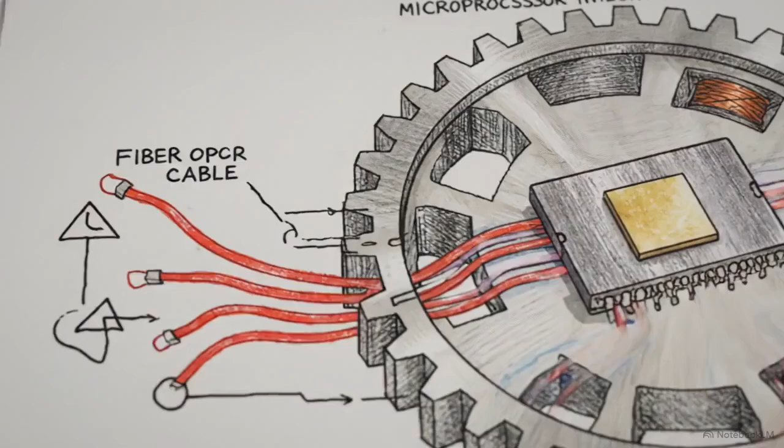When you embed a traditional machine with the capacity to process data, the digital logic and physical components operate as a single unit. The word mechatronics combines mechanism and electronics. This etymology reflects a design philosophy where the boundary between hardware and software is removed.

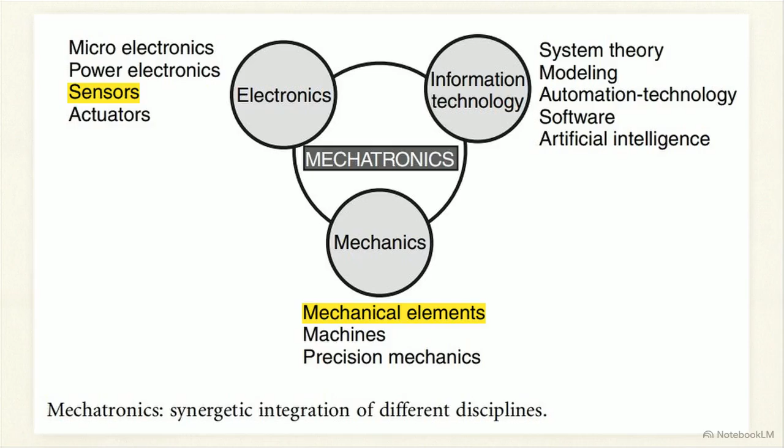This diagram illustrates how those boundaries overlap, showing the intersection of mechanics, electronics, and information technology. The components on the right, information technology, guided by system theory and automation software, serve as the bridge allowing mechanical parts to communicate with electronic sensors. The purpose is to apply complex decision-making to the operation of physical systems in real time.

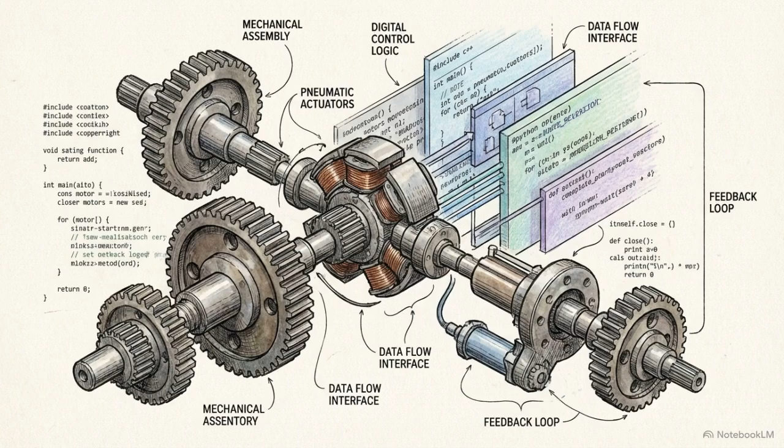Mechatronics requires a concurrent engineering approach, where computer logic and physical gears are designed together from the start of the project. Engineers have been combining these systems for the past 30 years. Many professionals naturally designed mechatronic products long before the field was formally recognized.

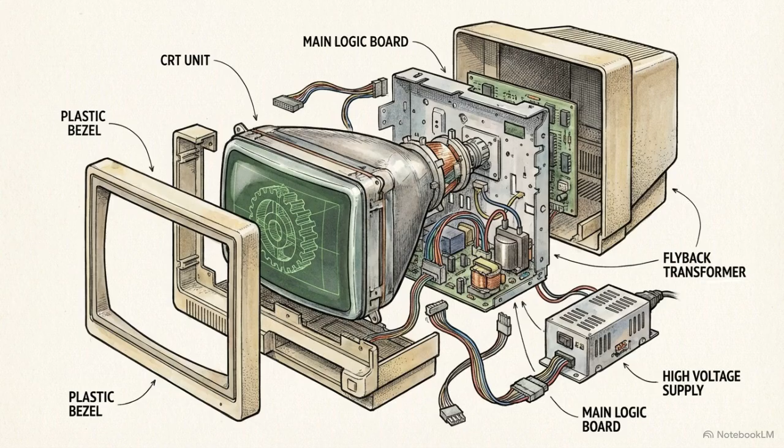The formalization of this practice traces back to the early 1980s. The turning point was the commercial arrival of the cost-effective microprocessor. Once engineers cheaply embedded processing power directly onto hardware, engineering design constraints shifted. Today, that growth is sustained by the ongoing information technology revolution, rapid advances in wireless communication, and embedded systems engineering.

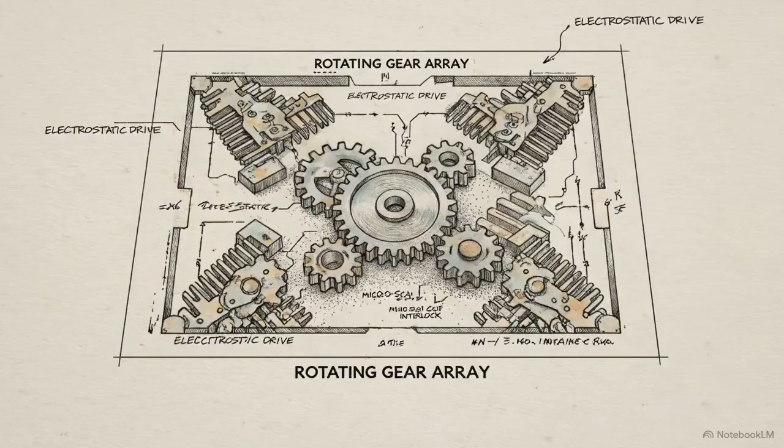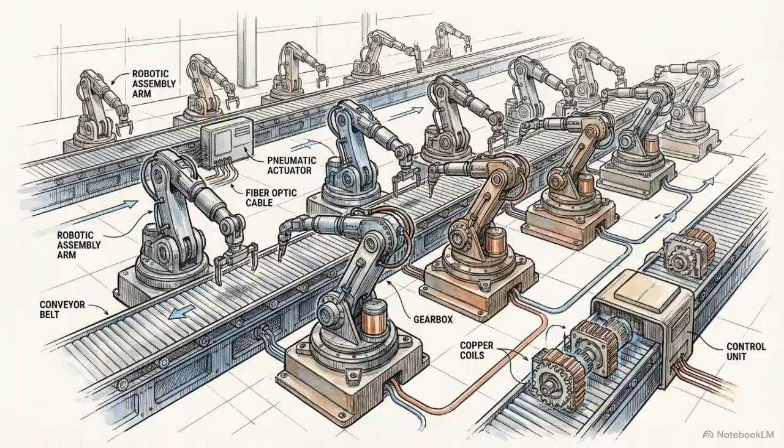The hardware driving this forward is heavily reliant on MEMS technology. MEMS, or microelectromechanical systems, are microscopic devices that integrate mechanical and electrical components on a single silicon chip, enabling advanced smart sensors. As the performance-to-cost ratio of microprocessors and MEMS sensors increased, mechatronics moved from an academic theory into a standard requirement for modern manufacturing.

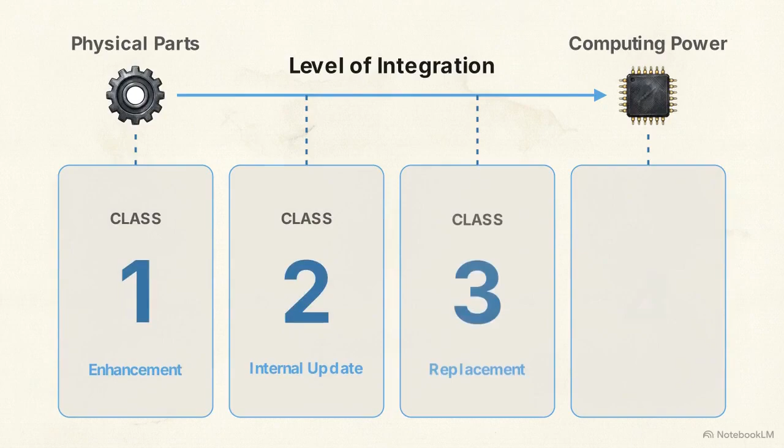Based on the level of integration between physical parts and computing power, all mechatronic products fall into one of four distinct classes. Class 1 consists of mechanical products where electronics are added to enhance an existing physical function.

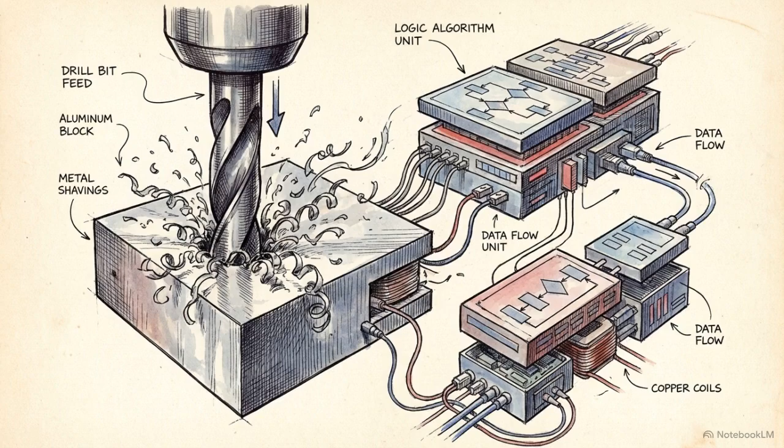Examples of Class 1 include variable speed drives and NC machine tools. NC, or numerical control, refers to the automated control of machining tools via programmed commands, updating a physical machine with digital instructions. Class 2 involves mechanical systems with updated internal electronics, while the external user interface remains unaltered.

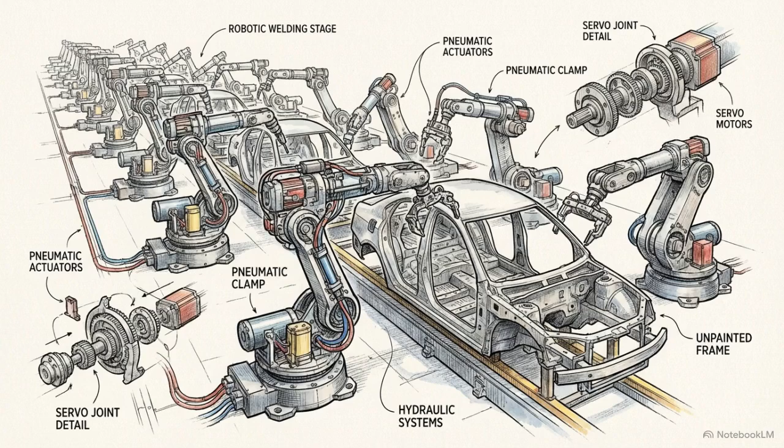Automated manufacturing lines and modern sewing machines fall into this category. Class 3 systems retain the functionality of their traditional mechanical predecessors, but their internal physical mechanisms are replaced by electronic components.

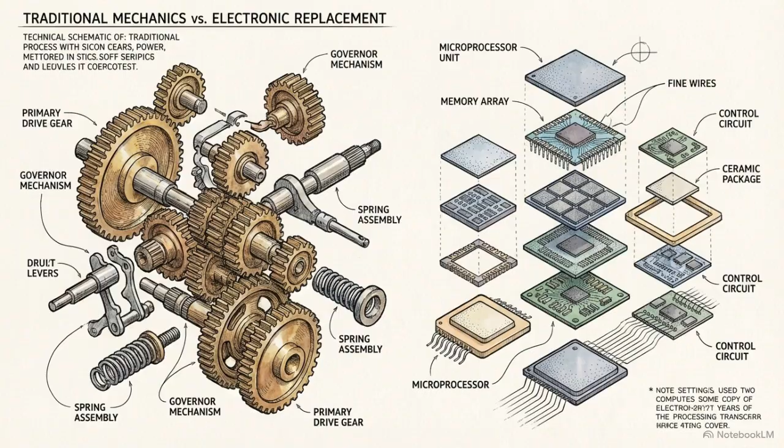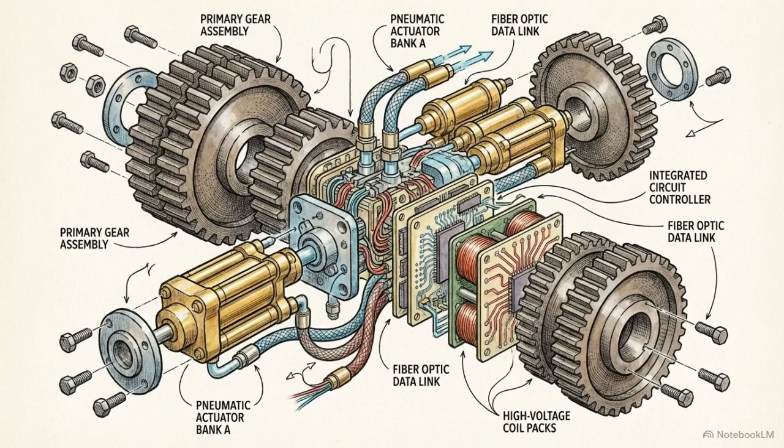The digital watch is the definitive Class 3 system. It tracks time like an analog watch, but the physical mainspring and gears are replaced by a quartz crystal and digital logic. Class 4 products are conceived from the start with mechanical and electronic technologies integrated synergistically.

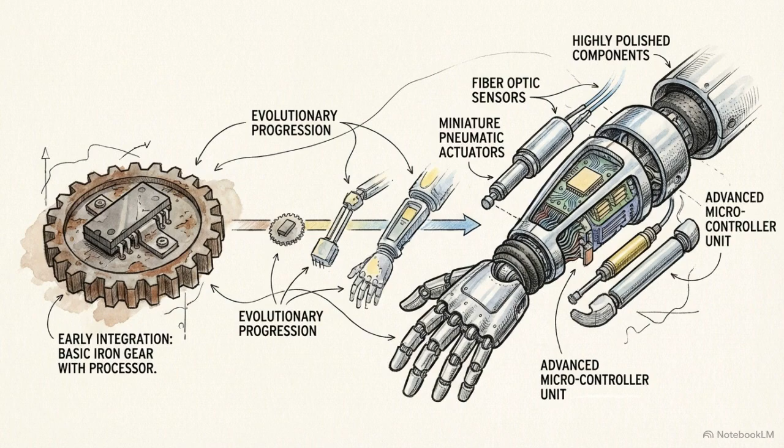Intelligent washers, rice cookers, and automatic photocopiers are Class 4 systems. They require sensors, software, and moving physical parts to function as a single unit. The move from Class 1 to Class 4 documents the shift from treating electronics as a mechanical add-on to treating the machine as a cyber-physical entity.

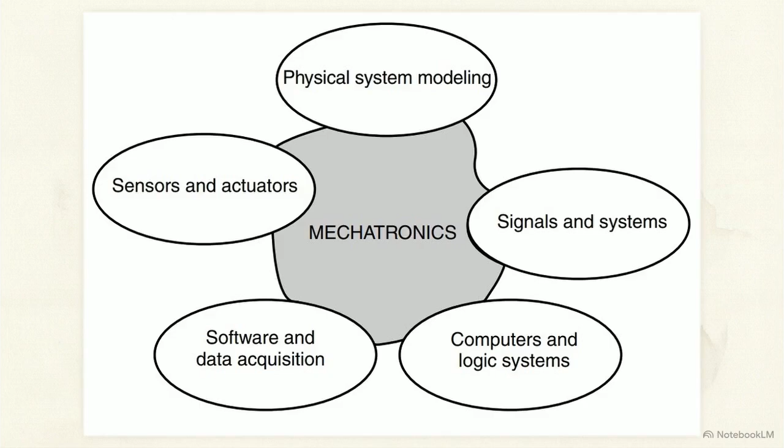This mind map outlines the specific architecture required to build those systems. The study of mechatronics is divided into 5 distinct areas of specialty. Focusing on the top center node, the first element is physical system modeling.

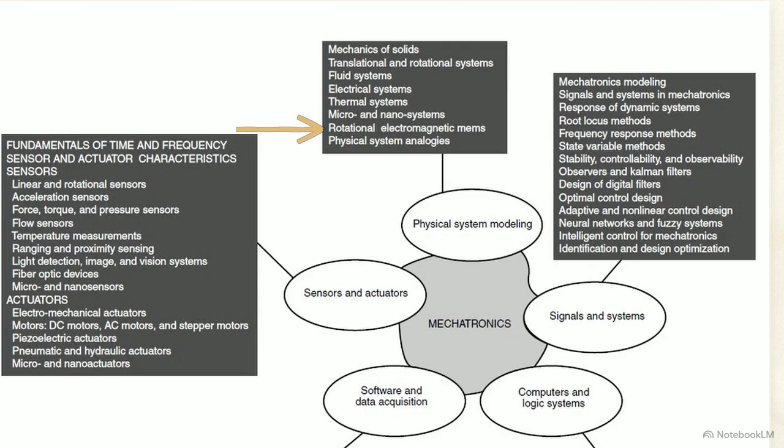This requires calculating mechanics of solids, translational and rotational systems, and tracking fluid, thermal, and electrical dynamics. This list includes rotational electromagnetic MEMS, as physical modeling now extends to microscopic levels.

This detailed view of the left-hand node outlines the second element, sensors and actuators. The top half lists the input devices required to measure the environment, including linear and rotational sensors, acceleration sensors, force and torque measurements, flow sensors, and vision systems.

Once the environment is measured, the system uses actuators to move. These include electromechanical actuators, DC, AC, and stepper motors, alongside piezoelectric, pneumatic, and hydraulic systems.

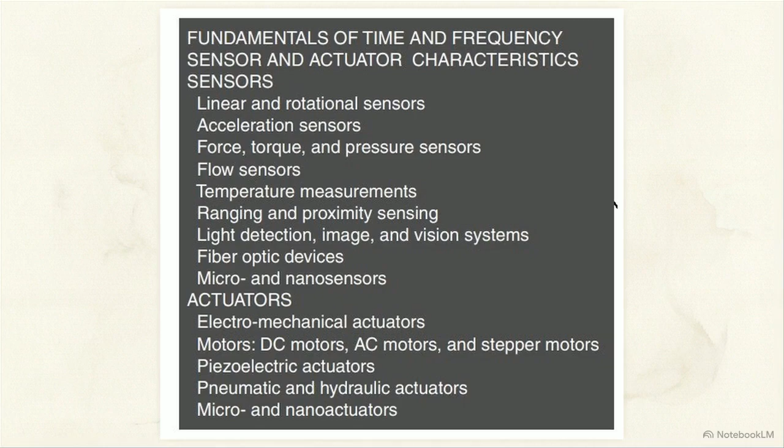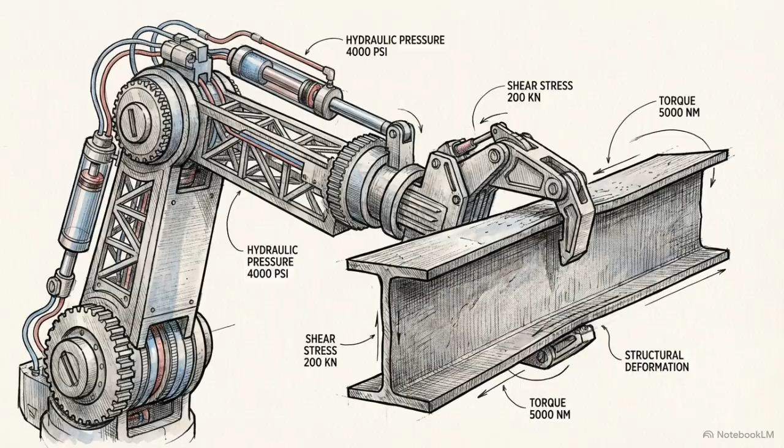Elements 1 and 2 establish the physical constraints, dictating what the machine can endure and how much force it can exert on its environment. Looking at the right-hand node of the schematic, we move to the intangible logic that governs that hardware. Element 3 is signals and systems.

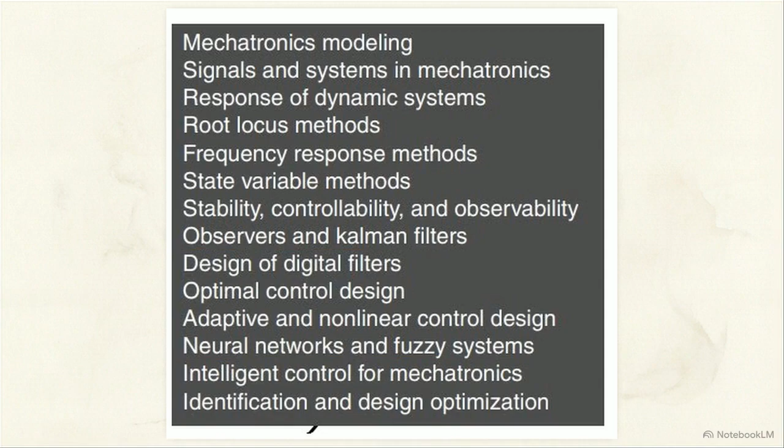This area relies on mathematical methodologies, including root-locus methods, state variable methods, and frequency response analysis to maintain system stability. It also incorporates advanced control designs like neural networks, fuzzy systems, and Kalman filters. A Kalman filter is an algorithm that uses a series of measurements over time to estimate unknown variables, which is vital for dealing with sensor noise.

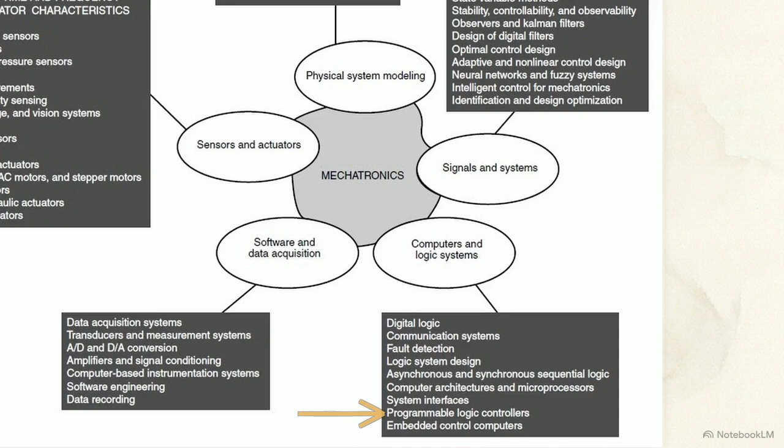Directing your attention to the bottom right node, we find Element 4, Computers and Logic Systems. This covers the digital brain. It requires digital logic, communication systems, fault detection, and programmable logic controllers, or PLCs. PLCs are ruggedized computers adapted specifically for industrial manufacturing processes.

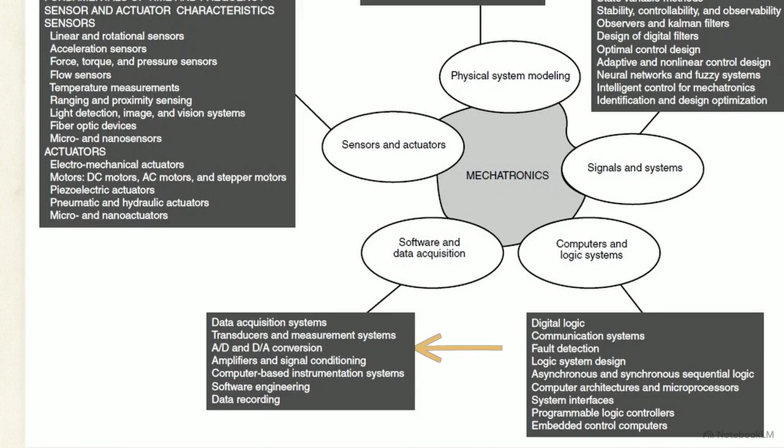The final piece is software and data acquisition, listed in the bottom left node. This acts as the translation layer, handling signal conditioning and relying on AD and DA, or analog to digital and digital to analog conversion. These three domains, signals, computer logic, and data software, process the raw input from the sensors and calculate the precise mathematical response required from the mechanical actuators.

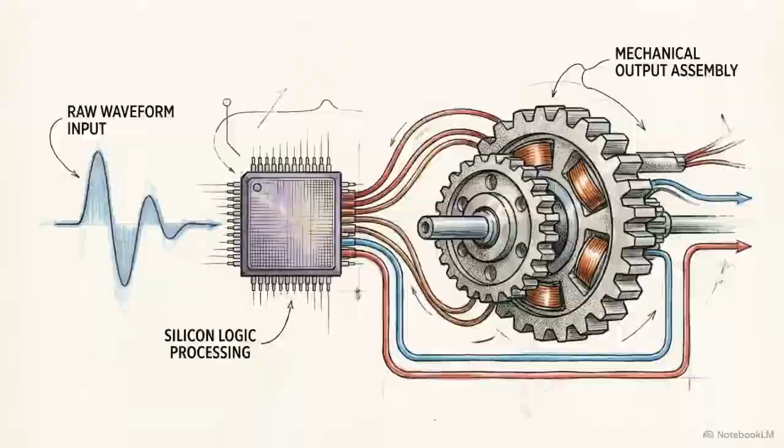The evolution of the automobile provides a historical record of these five elements gradually integrating to move vehicles from Class 1 to Class 4 systems. Until the 1960s, a car was almost entirely physical. Aside from basic electrical loops, the dashboard radio was the only significant electronics in the vehicle. When occupant safety systems like seatbelts were introduced in the early 60s, they were entirely mechanically actuated.

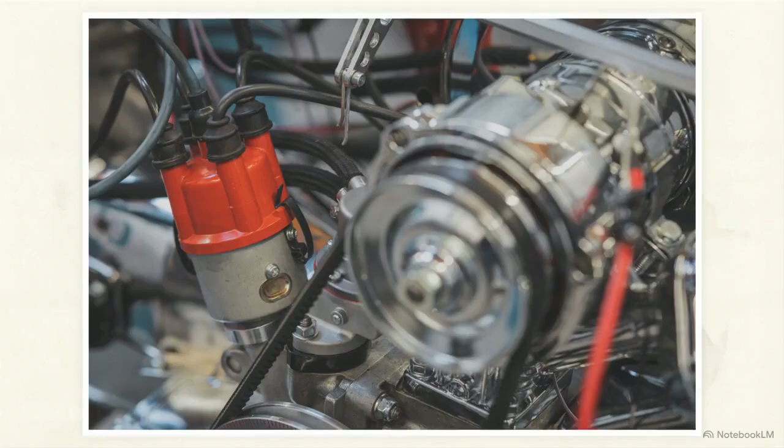Engine control was similarly rigid. A mechanical distributor selected spark plugs based on engine rotation. While functional, it was inefficient for fuel consumption. In the late 1970s, the electronic ignition arrived, representing one of the first true mechatronic systems in automotive design.

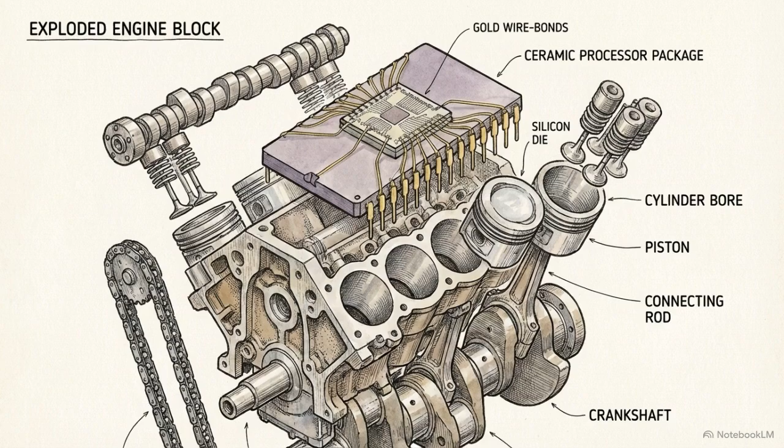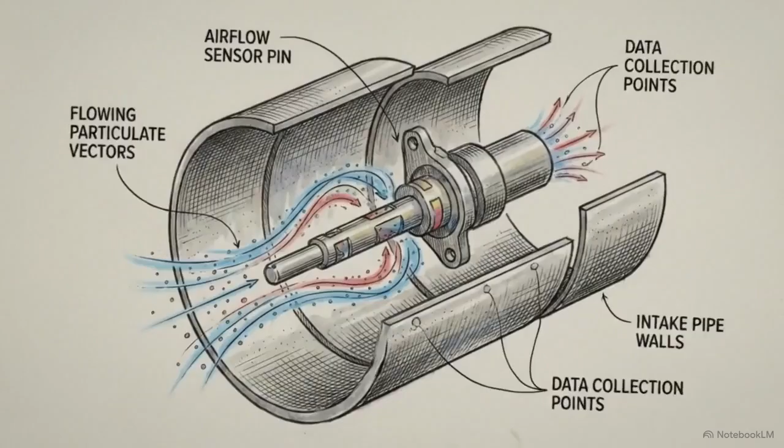Instead of a physical distributor, the system used dedicated microcontrollers. It pulled data from airflow sensors and Hall effect sensors to time the spark ignition, which detect magnetic fields to measure the position of the crankshaft and camshaft based on load and speed.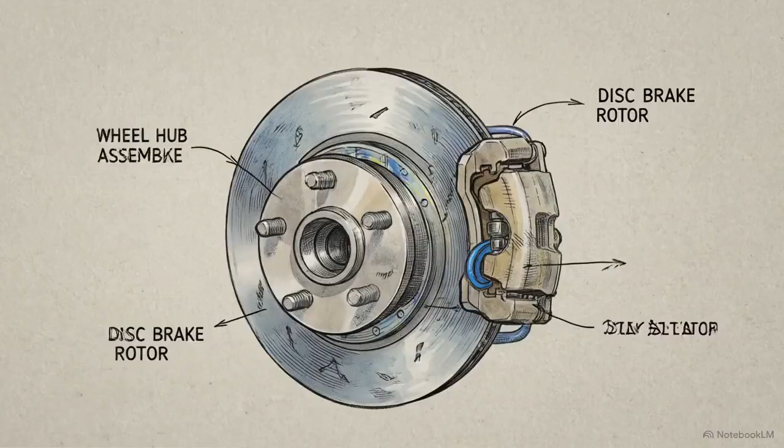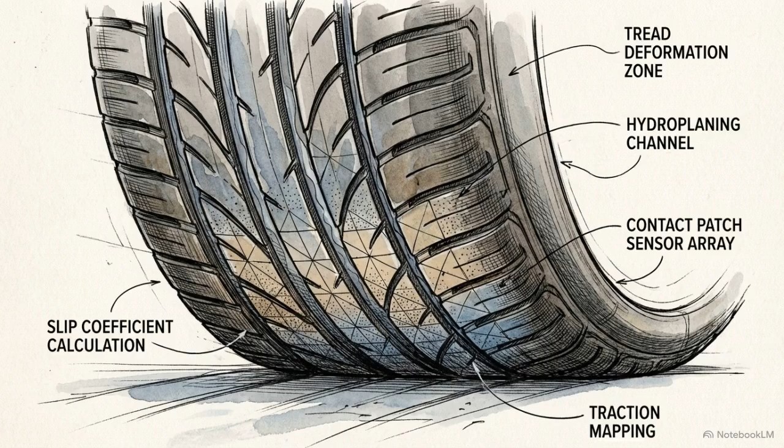During this same period, the anti-lock brake system, or ABS, was introduced. ABS uses sensors to detect wheel lockup and then mathematically modulates the hydraulic pressure to prevent sliding. By the mid-1990s, this evolved into the traction control system. TCS senses slippage during acceleration and modulates power to the wheel to maintain acceleration under poor road conditions.

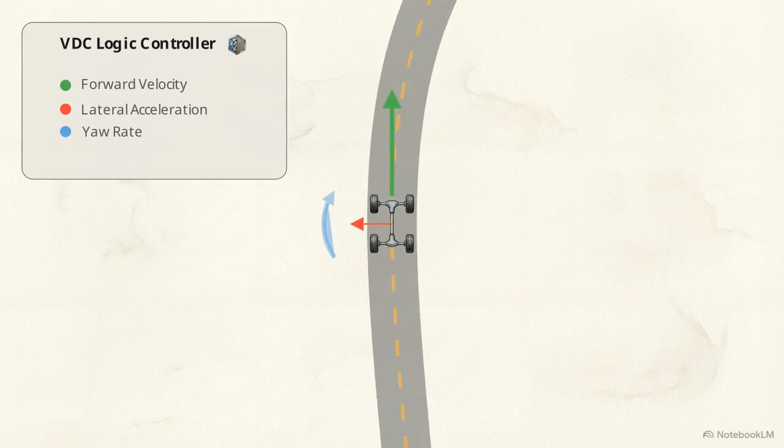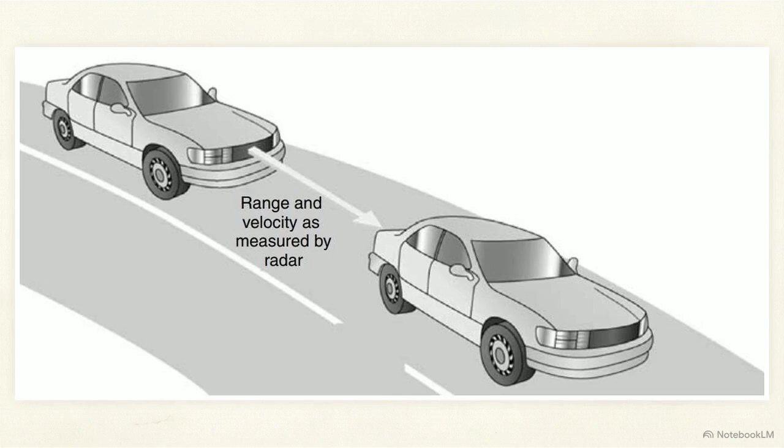In the late 1990s, Vehicle Dynamics Control augmented the TCS by adding yaw rate sensors and lateral accelerometers to track the vehicle's physical orientation. Modern standards use integrated radar systems to continuously measure range and velocity, allowing the vehicle to autonomously maintain a safe distance from other cars.

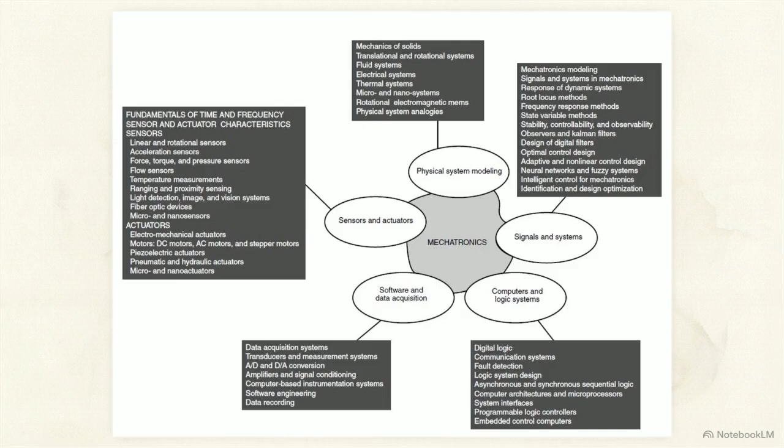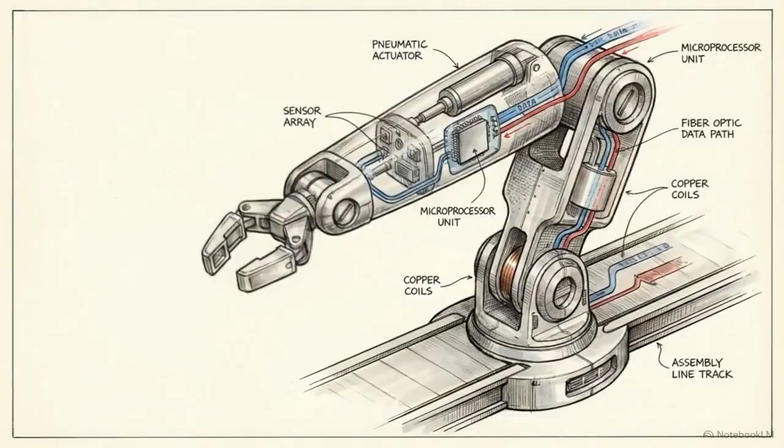Modern vehicles operate through a continuous millisecond by millisecond feedback loop between physical modeling, sensors, logic controllers, and software. Looking at the complete map of these intersecting disciplines reveals the complexity required to build modern technology. Because engineering boundaries are no longer clearly defined, designing a product strictly through a mechanical lens is impossible. Engineers require a multidisciplinary education to contribute to these systems.

The future growth of this field is dependent on a specific set of enabling technologies. This includes the continued advancement of cost-effective microcontrollers and the expansion of MEMS applications for smaller, more accurate sensors. It also requires the maturation of adaptive control methodologies, real-time programming methods, and the integration of wireless networking.

Finally, it relies on mature CAE technologies. CAE, or Computer-Aided Engineering, uses specialized software to simulate advanced system modeling and virtual prototyping, allowing engineers to test mechatronic designs before a physical part is manufactured. This structure represents the current standard for modern engineering design.